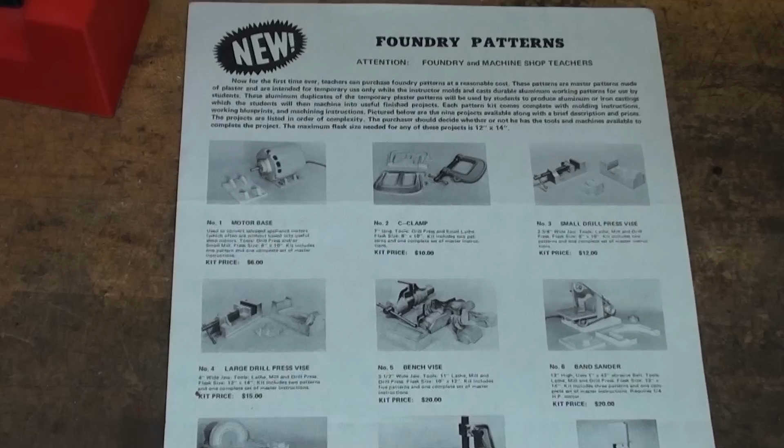I was a machine shop teacher along with my brother in different schools, and there's a great need by young teachers to find decent projects to make in their shops. Mine, in the advanced classes, were all revolving around aluminum castings. This was my early brochure, and at that time I had 9 different projects, all with plaster foundry patterns and instructions, blueprints, everything a young teacher would have needed to get started in his school shop.

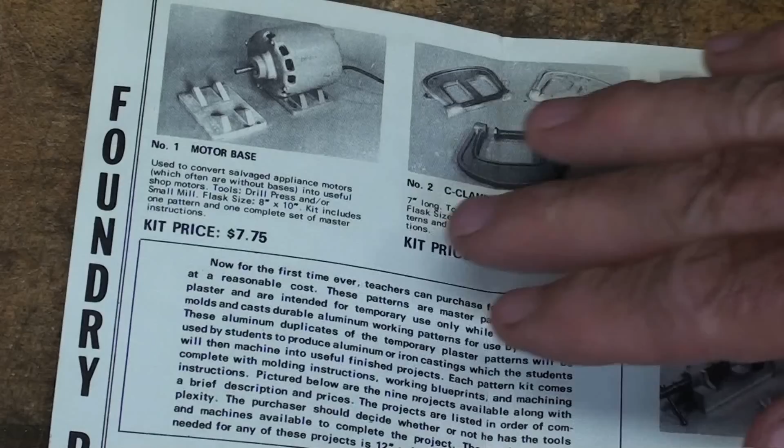On the other side of the brochure are all the different projects, what I just showed you again here, but I'm going to go over these one at a time, and then I'll show you some other related things to show you what I was doing in the shop. There will also be some footage here that I'll follow up with, with some of my old projects.

I own none of the finished projects anymore, but I have a friend who has a few of them, and we brought them over this morning and took some pictures of them. So let's look at what's in the brochure here.

There's a motor base that was used to convert appliance motors into a usable motor for the other projects. There was a C-clamp. That was probably the single most popular one. I sold an awful lot of those.

There's the small drill press vise, which will be featured in the next video. I'll be doing some castings with that and talking about 3D printed patterns rather than plaster.

There's the large drill press vise, and I had it all in black and white photos. There's the original black and white photo. Remember that the jaw and the main body were plaster.

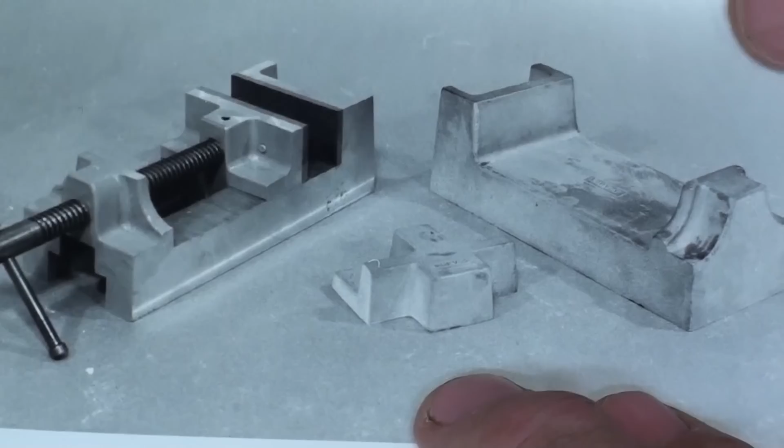They were meant to be sold to the teachers so that they could immediately, before they let the kids touch these delicate patterns, cast them into aluminum and clean them up as needed, and those would be the working patterns, with the plaster patterns thrown away. But they would retain all the rights to do this. That is the large drill press vise you're looking at.

There's a bench vise. I don't think I sold many of those, because how useful is an aluminum bench vise? Probably not, but this was about the learning operations we were concerned with.

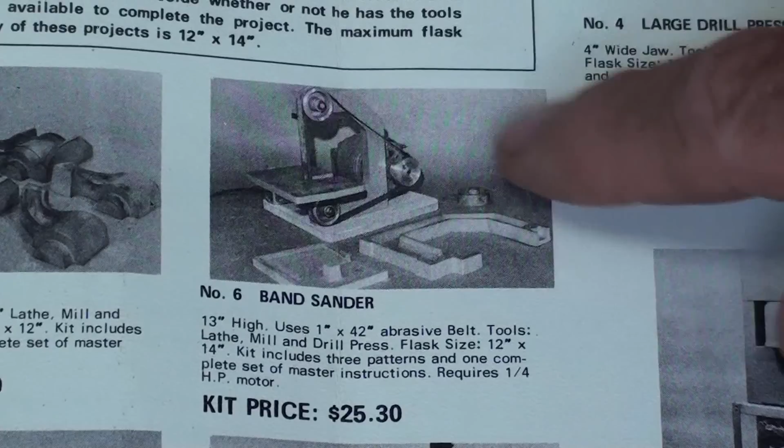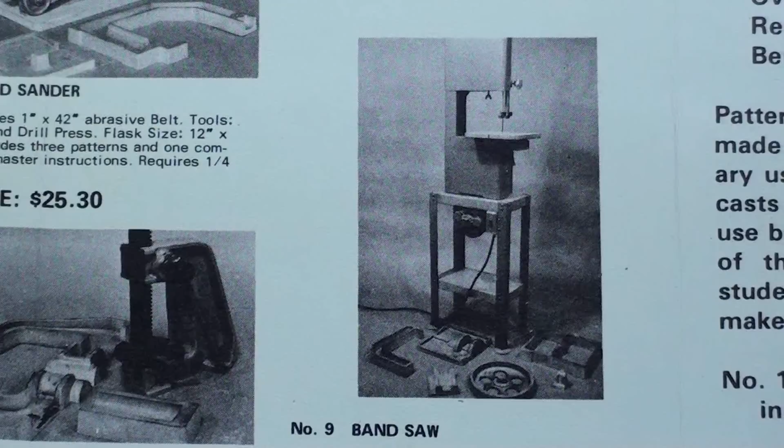There's the band sander, one of the most popular ones, and I cast up some wheels and put crowns on them in a recent video, so check that out. There's the disc sander, that'll be shown here presently, and the arbor press. And for the advanced students, we had a bandsaw that used the common blade used in a 10-inch Delta bandsaw.

So that's my brochure, and I sent tens of thousands, perhaps hundreds of thousands, of those out to schools.

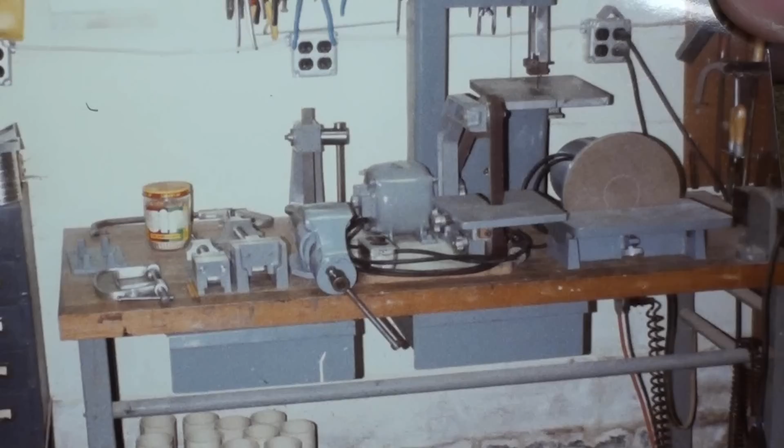There are all 9 or 10 finished projects pictured on my workbench, where I'm standing right now actually, but a different bench. This would be 30 years ago.

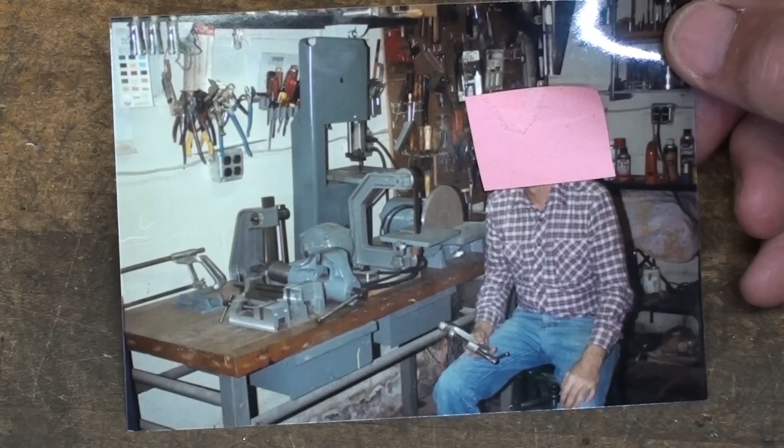That's me sitting at the bench holding the C-clamp. I can't believe how thin I was then, but I worked 12 hours a day for many, many years, a full day at school and then making these plasters at home. Who cares?

Here I am sitting on a stool with three items. This is the original wooden pattern, this is the plaster copy made in a rubber mold - it doesn't show up well because it's white - and that's the finished project. So it's showing the different steps.

This is what the teachers would buy, and that's what they would make. All of this stuff was thrown away and destroyed by me.

In this picture I can't tell what it was I was making, but that's a rubber mold with the plaster dripping. What a mess that was, and my fingernails were worn down to nothing from mixing the plaster with my bare hands. Never considered I should protect my hands, but they're okay - well, maybe that's why they look so terrible.

There I am, and I forgot all about this. Again, there's the finished small drill press vise, which I'll be making in the next video. There's the original wooden one, and this is the mold box. I forgot all about this, but there was an aluminum mold with Destaco clamps on each end, and that's how I made that one - just a little bit different than the others, I guess. I forgot all about that.

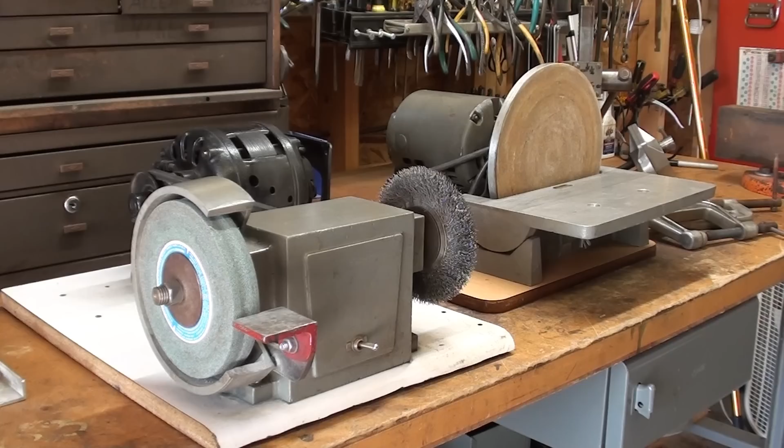In this section of the video I'm going to show you a few of the Petersen Products finished projects that were made in my video, through the courtesy of my friend Joe, who I taught with for many years. He brought these over to my garage so I can film them and talk briefly about them. But first let me say something about a couple of projects here - they were not Petersen products, they were just projects I came up with, made in the shop. I had patterns but didn't try to sell the pattern.

Here's a little grinder with a motor attached. It's pulley belt driven, and there were two shields on here, two guards, but he put a wire brush on one end. There are ball bearings in there, but that's what it looked like. Let me show you the back side of it.

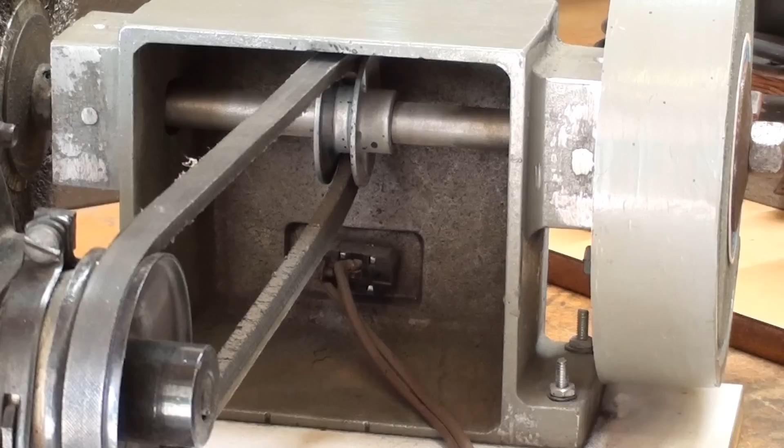You know what, I didn't really consider this one of my very good projects - matter of fact, to me it's a failure. But you can see the shaft runs through there, and there's the switch and the pulley and the belt and all of that. But some of these projects required a motor, so that was always a problem, getting the kids to bring in motors.

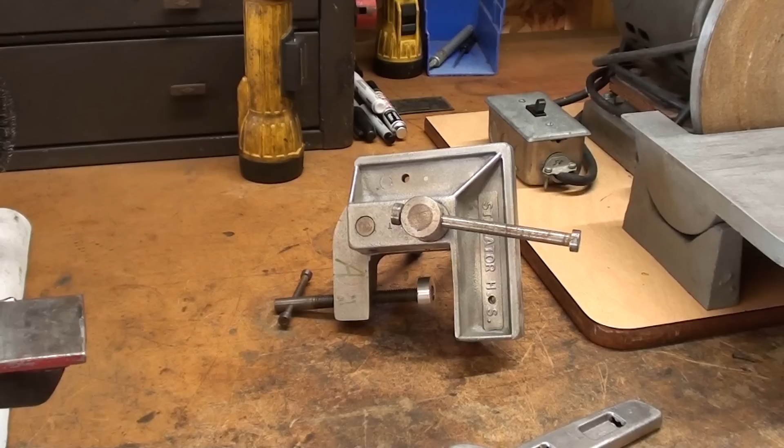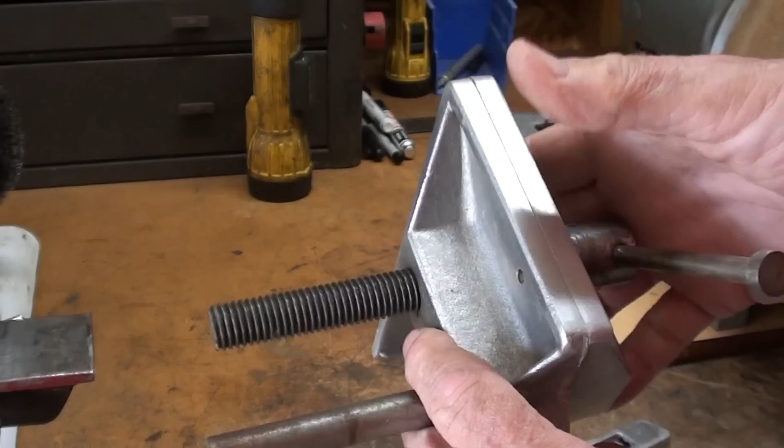Here's a little woodworking vise that the kids made. That kid got an A on it. You can see the name of the school on there, and that was the students' initials. This was really pretty much a copy of a little Stanley vise - you might even recognize this - and it just clamped onto the bench.

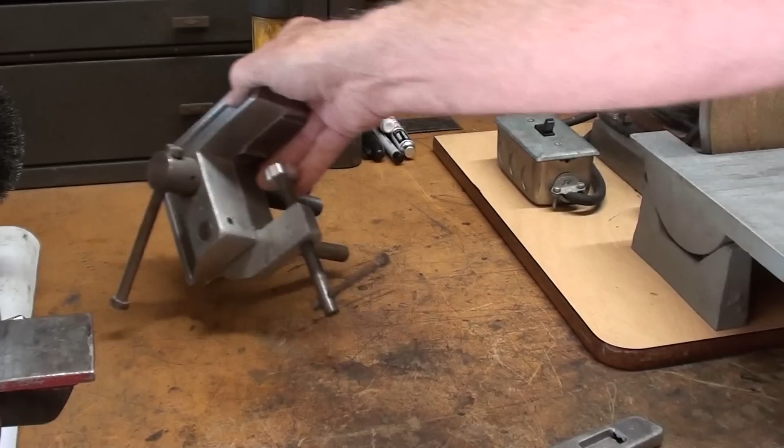This pattern was mounted on a match plate. I remember that now, long time ago. Brings back some good memories and some bad memories.

This particular project is a jab saw made of aluminum. Holds a standard hacksaw blade, choked way up, with a little clamp for it there. This project was unique in that I had a metal pattern for it, and it was shell molded - you know what shell molding is, with resin bonded sand? We made hundreds of these showing the kids how to do shell molding, something I've never talked about in my videos. That was a tough pattern to make, believe me, so that a blade would slide in there without any external cores.

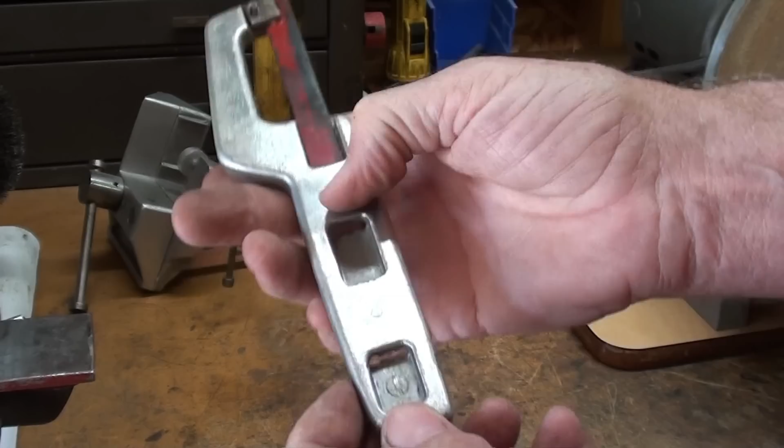I don't know why I put this hanging tab on there. That was kind of stupid. And I used a special plaster called Tough Art. It was a fiber-filled plaster - in other words, it was a reinforced plaster - because these patterns were delicate.

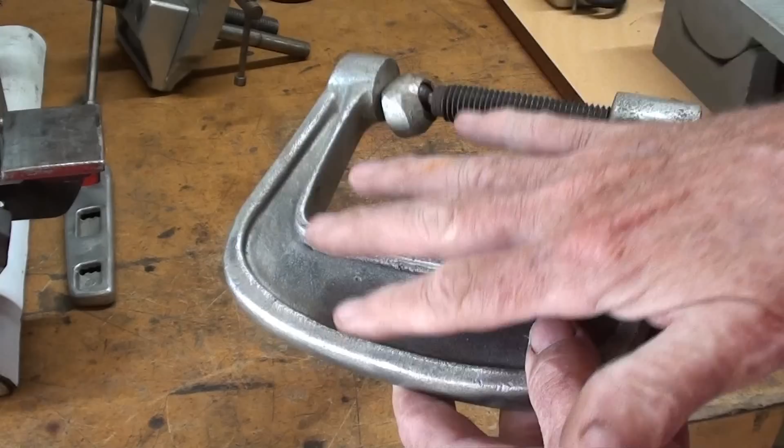However, I had mine mounted on match plates, I think 2 at a time, with many extra swivels because they would misdrill or lose the swivels or throw them at each other. So we made tons of this. I think this was item number 2.

And what good is an aluminum C-clamp? I know what you're saying. And if you force these, they will consistently break right here - this is the weak spot. But these are great for woodworking.

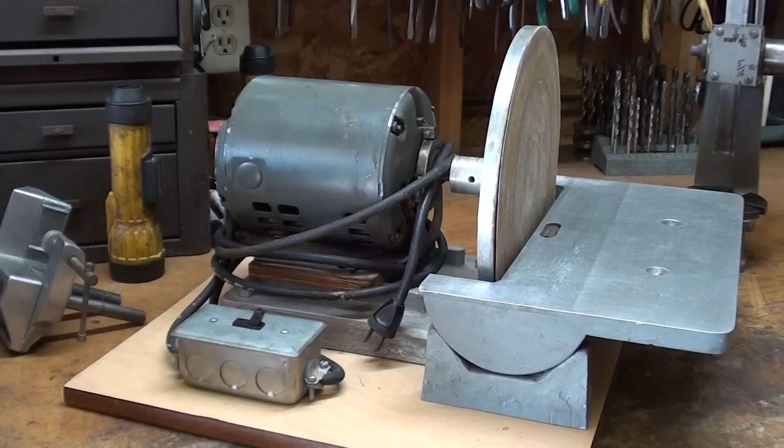We made many of these disc sanders. It's a 10-inch disc. They had to bring a motor in, so there's 1, 2, 3, 4 castings - the disc, the table, the rocker assembly here, and the base back here. So that used a lot of aluminum.

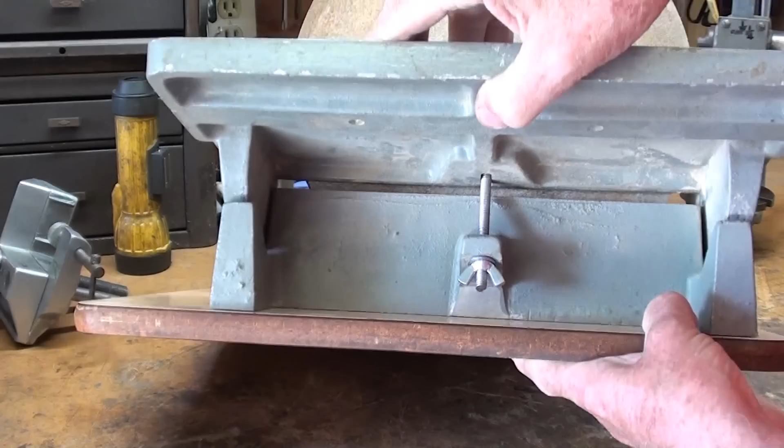It really was a pretty good project, and this table will tilt. You can see here it's more or less a V-block. And that's what it looks like underneath.

This one looks like it's been jury-rigged with a piece of wood there, maybe to get the motor to the right height. I don't remember. This goes back a long ways.

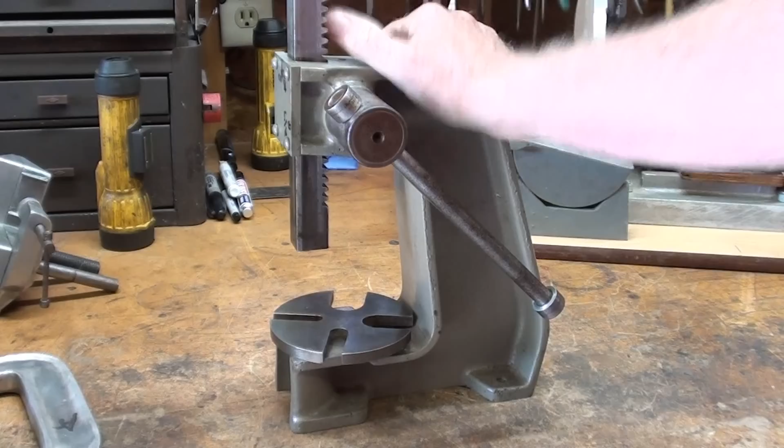And this is obviously an arbor press. We made a lot of these. What good is an aluminum arbor press, you're saying? Well, they learned a lot, even if it wasn't all that functional. The platen here, you know, they had to make the platen. Again, this was a split pattern. They had to cut a gear and a rack. There were a lot of good operations in this, and some math involved too.

Do you find this semi-interesting at all?

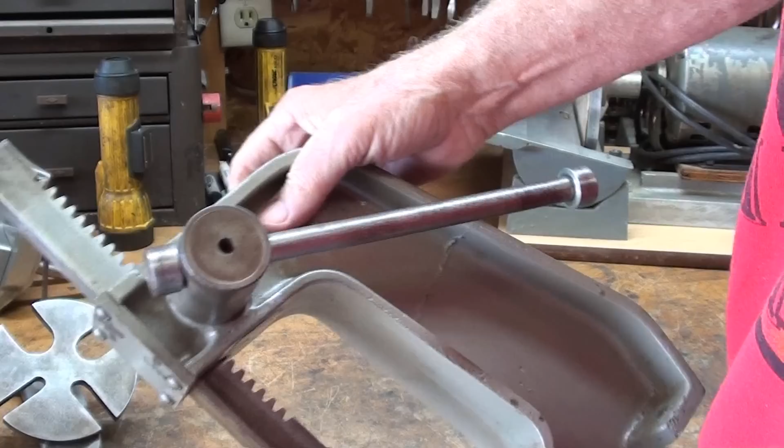Well, that's all of the finished projects that are known to exist. But let me tell you a little story, as it is my wont to do. Recently, the manager of the Subway store here 2 miles from me contacted me, and she said, "You had my husband in class. He has all these projects, including the bandsaw and the band sander. They're still in his shop. We are moving - do you want them? I'm giving them away, we got to clear our garage." And that's just 3 or 4 months ago.

And you know what I said? No, I do not want them or any of the memories. So I wish I had all those things - I'd be able to show them to you. I suppose they got scrapped.

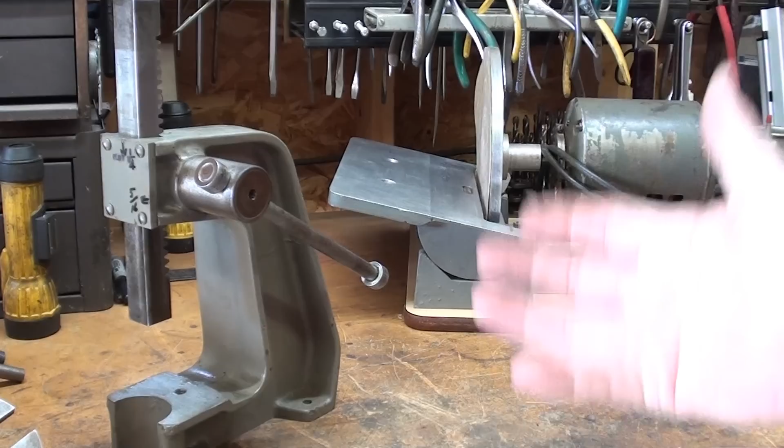When I attend auctions from time to time, I see some of my projects - they're on the auction wagon. Next time I see them, I think I'll buy one if it's something I'm not able to show you right here. All right, that concludes this part of the video to show you what I did in the school shop with my own Petersen Products projects, and how I developed the projects over the years along with my brother.

I had samples of everything I used in the photography that you'll see in the brochure. All of those I cut into multiple pieces and melted down because I was so sick of them. I wish I had some of them to show you.

All of the rubber molds were thrown away and destroyed, and almost all of the paperwork. There were filing cabinets full of the paper, but I do have one of each of those to show you, which I am showing in this video. So, thank you for watching this part, and I'm not done.

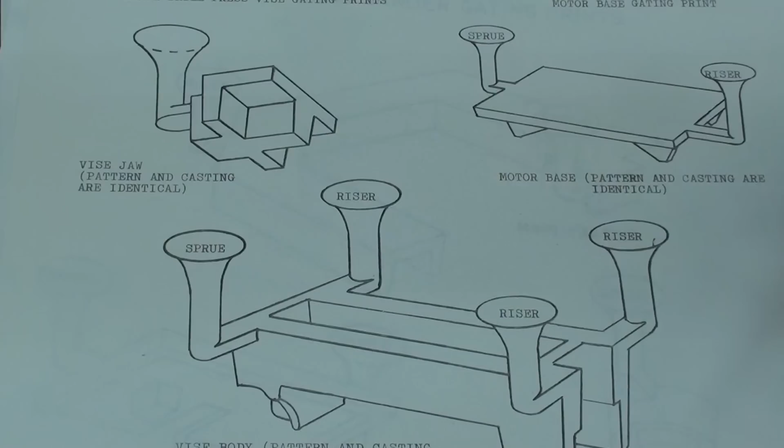The teacher would receive a sheet like this for every different pattern, showing how to run the sprues and the gates. Actually, there's two on this one. There's the motor base, and then this is the large drill press, but it's gated pretty much like the small one.

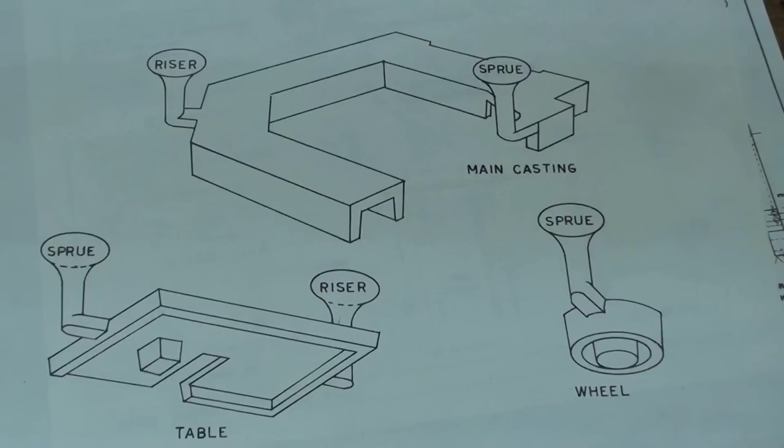And there's the band sander gating prints. There were 10 blueprints like this. Some of the projects required more than one sheet, but here's the band sander, 1x42 belt, and all the dimensions, and always an isometric so the kids could get a clue on what it should look like.

That idea I gleaned from the Casting Specialties CF Struck drawings, which I thought were very well made. I remember ruining a whole summer of my life when I was taking summer school and having to make these drawings. That's what made me start to hate drawing, and I do very little of it because of that. Burnt me out like an old GE light bulb.

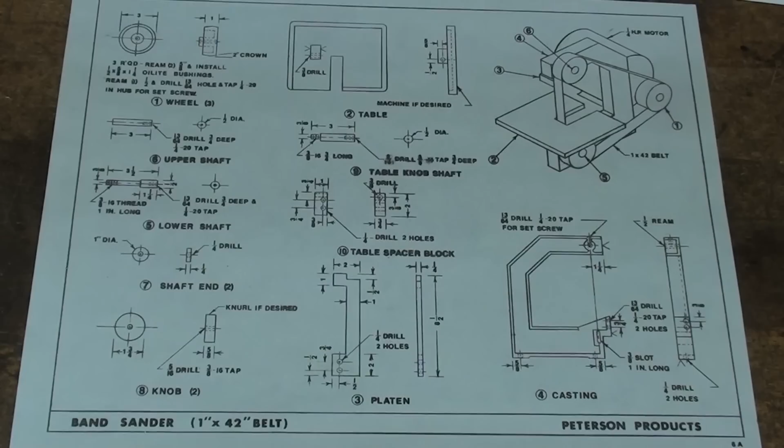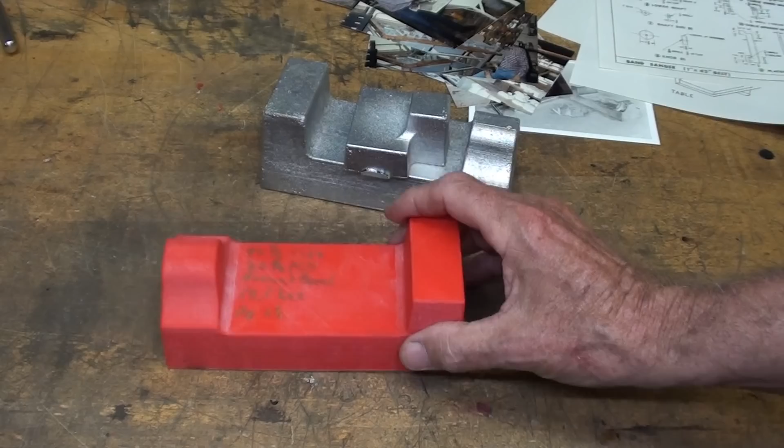One of the things I'm contemplating in this video, and probably the next one, is: let's say I was going to start Peterson Products today. The amount of work was tremendous and I had to work every day at it. But now, would I do it this way? Would I make 3D files that I'd sell to teachers, and they could go to their 3D printer and print out the working patterns, rather durable, as a 3D print?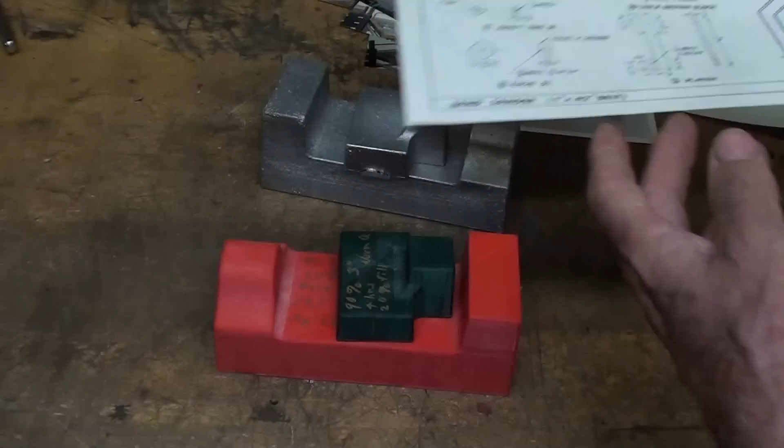There's the jaw. There's still some sand stuck in there, you can see where I used it. But there's a pattern - I would not have to sell these. I'd only sell the idea, and even the blueprints could go to them as a PDF file, so there would really be nothing to ship. It would all be over the internet. That's how I think I would do it, or attempt to.

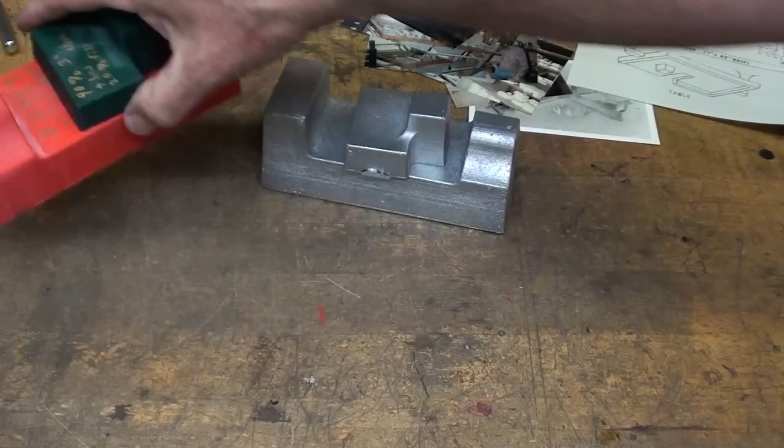So the next video is all about this. I'll make some castings, and then there might be later videos where I actually go ahead and machine it. Although I've done so many vises, I don't know for sure whether or not I will. But there would not be a finished drill press, just the aluminum castings - that would have to be machined, of course. Ultimately this is what the teachers want, the aluminum castings, but to get them we have to go through all those other steps.

So leave in the comments - do you think it would have been a good idea to go this way rather than the messy and delicate plaster? The plaster patterns were very susceptible to damage in shipping, because, you know, they're so careful at the post office and UPS - they never throw anything. I'm being sarcastic, I'm sorry.

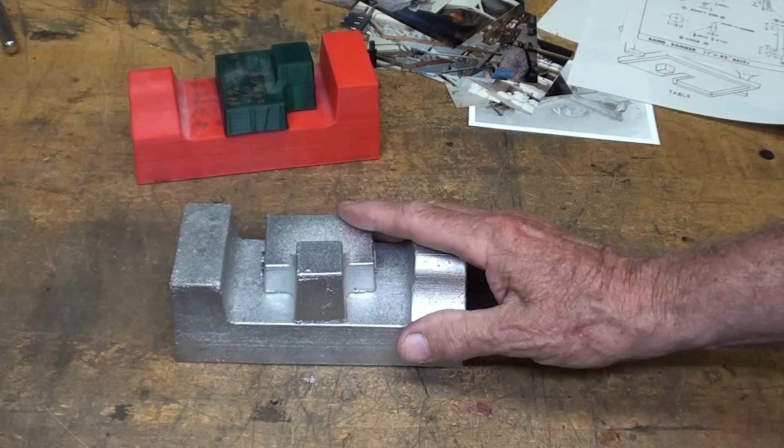But there it is. Of course they'd be better out of cast iron, but very few schools would have a cast iron foundry - very few, if any. Now there are very few that even have aluminum. Well, this wouldn't fly now anyway, because school shops have been largely dismantled, but let's say they were still going - that's probably the route I would want to sell these. But I'm way too old to do anything like that anymore anyway. Well, that is the end of this video.